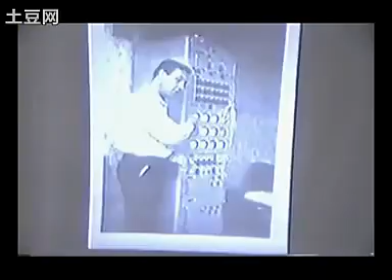This photo is the very first press photo. The press medium came because I advertised in the paper that I wanted members to develop a new type of craft. Here we were demonstrating a ball race.

The ball race, to most technical people, is a subject that must be well greased. For my work, grease prevents the operation, so we get rid of it. Never mind what the scientists say that it will seize up — it doesn't seize up. In fact, you could do some very amazing experiments, which I did for the media, and we recorded the evidence on the tracking equipment. Now from that, the development grew, and we'll show you the next shot.

Here we are, the very first roller that was produced in Germany a couple of years ago. We are holding it because this was a great excitement — hundreds of people have been trying to make this roller. They gave up because their thinking was wrong, that's all that was wrong. They got the roller out and it kept cracking. That is my safety net: no one is going to copy that roller unless they're working full heart with me.

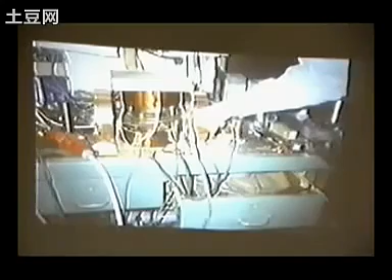Again, you see another view. If you notice, there is a number of coils involved. This again is slightly different to normal practice. Another view of the coils.

Another view. So anyone wishing to make these rollers, realize you've got to have a bit of patience - and I mean patience - and don't give up.

Now you may say, why can't you make it? Well, let's put it this way. If you make a house brick, you've got to buy the ovens and all the necessary equipment to make that one brick - that costs you a fortune. That's the same here. To make one roller, you may be looking at £12 million. So you've got to make millions of them, because after the first one, they cost very little to make. That first one is the bug.

Here is the magnetic field around the first segments produced in Germany. By the way, these pictures are in the books, so those who want to study them more closely can do so.

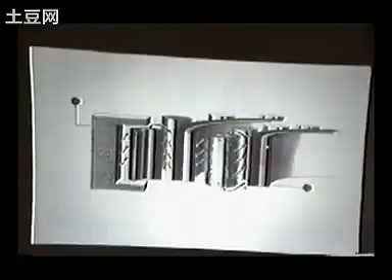Now here is the illustration of the SEG build-up. Can we show the plates with the pointer, please? You notice that is what we call the plate in which the rollers run on. That's what we call the roller, and these have to be slightly shorter than the plate, so they have free movement.

We show here the coil which we build on the outside of the last ring, which supplies the final work. The only difference between this machine and the conventional machine is that this is the prime mover. The coils is standard practice.

Notice we've shown 4 colours. That represents the different layers of elements which are compressed to form the plate. The same must apply to the rollers. The weight of, or the volume of the plate must be equal to the weight or volume, whichever you like to say, of the roller. Therefore, each roller in itself is a generator of its own.

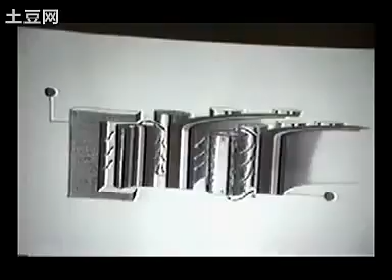Here is a magnetic demonstration which so many people witness. There are letters in the books of people from Australia who saw this demonstration. This particular one is from the report of Gunnar Sandberg of Sussex University.

Unfortunately, he gives you a slight wrong explanation. He says when you place the roller at the edge, it accelerates to its cruising speed. He could not tell you it goes instant at go to the cruising speed. The other people tell you in their report it goes instant to the cruising speed. Why should Gunnar Sandberg say it accelerates? The reason is this.

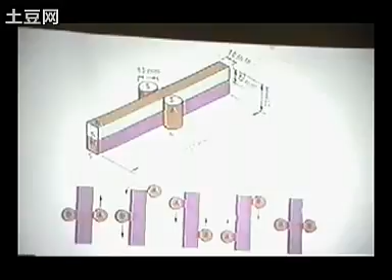He works in the electrical department of Sussex University. He should know why it goes instant, and he does not know. It baffles him. If I was in his place, I would say this goes instant to cruising speed, but at this time I cannot explain why. But we will investigate it and tell you when we know. It would be much, shall we say, more polite, more professional than the way he went about it. You see, as we shall explain a little later, why it goes instant to its cruising speed.

Now this is the reason why the roller rotates. We have 4 elements - you see the colour showing each element. What is happening is we have energized with DC, and on this DC we have used AC. The AC and the DC must be switched on exactly at the same instant. The AC must be at the 0 point, and it must be on the upward climb. It must switch off at the 0 point on the completion of a cycle. If you fail to get that right, the AC will erase the DC.

But if you get that timing dead right, you're left with thousands of little pinpricks of forces. It is difficult at this time to say if these are true magnetic points, or whether we have got surges of electrons on one side and surges of holes on the other side.

But one thing is certain, that if the plate and the roller are magnetized precisely the same, we have a strange position. It says you have got one pole there, but you don't have a pole there - the pole is over here. The next pole is above, that is not in line. You have a wave.

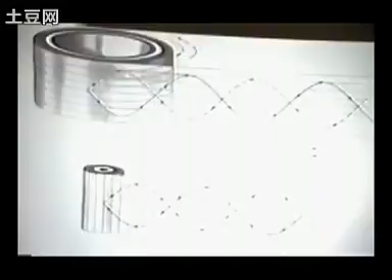Now we have something completely different. We've still got the 2 outer ones, and they fit on the plate with the 2 on the plate, and the roller cannot move either way, sideways. But now, you see, we have gotten 6 more runs of these mysterious poles. They are exerting a force on the plate, so it accelerates.

Another beautiful thing about this is you just drop it on the plate and away it goes. And they say, how did you do that? I didn't do it, that did it.

I look at this and I say, why do we always take the hard road? Because when you drop the next one in, it just sorts itself out. It finds its opposite point to the one operating. Every roller must go the same way.

No matter how many plates you have, they will always go the same way. Now the question is, how do we find how many rollers you want on the first plate? Because we obviously need to know that we've got a steady output. Well, the sum is quite easy.

You take square 3, you know the answer, you're all going to say 9. You're wrong, it's 9 fields. Every field has a value. When you calculate these values out, it is the sum of each column, or each row, or the diagonal. It's the answer to the material quantity you need. Every element is defined by that square that you're going to use.

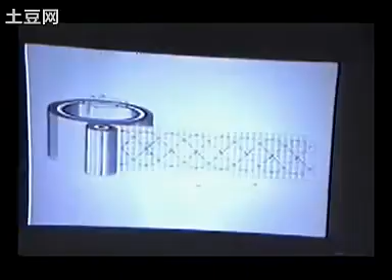We'll now take the next view. As you see, what we have is actually 2 waveforms going one direction, and then we actually got 2 others going in the opposite direction. We'll look at next.

Now this is an enlargement of one of the plates, and this actually is a true plate. We give the measurements, we show you the ingredients we use. As you see, we use a rare earth at our outer edge.

Then you see we use a nylon, and I like to say why I fancy nylon. We can use plastic, but in Germany we see, when I look at the finished thing, that the plastic looks terrible crude. It looks hard, it looks brittle, and we believe that nylon gives a better finish.

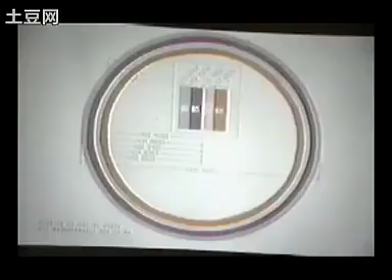Next to that, we take an ingredient. It can be iron or any other of the magnetizing materials. And then on the outer coat, we put one which will not magnetize, but it must produce an eddy current when a magnetic field comes in touch with it. That is the basic of it. How and why it works, later.

This is how the SEG looks. We only use 3 plates. You can use 4 or 5, but then you've got to consider if you're rich - if you're rich, of course, you can put more plates on. But this is a prime mover.

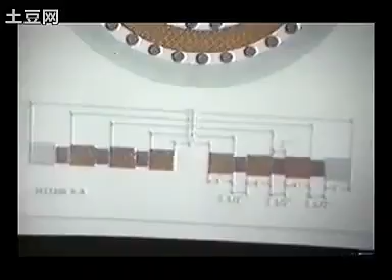It can be used as a home domestic power plant, which we are now developing. It can be used as a car engine. It can either be put straight in the wheels, or it can be put in where your engine is, and 4 electric motors, 1 on each wheel. You've got the energy, you can run at mains, you can run higher if you wish. We can also use it for powering trains, we can use it for aircraft, and it is used on a very large scale to power our levity discs, as they were called.

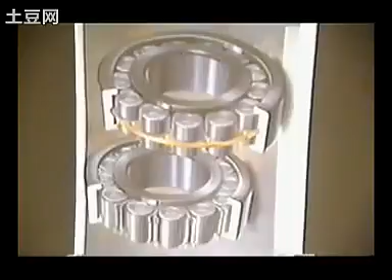Here is basically what they look like. If you can consider ball race, that's what we call them in England, that is exactly what you're looking at in this generator, except you do not need any housing or cage to hold them.

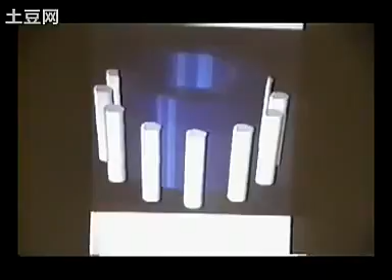This is 1 ring and the rollers, to give some idea of what we're talking about. This is a completed one. These pictures are in book 4.

When you do research work of a massive size, no man can do it on its own. There's too many things involved. You need a dedicated team. This is why I say to all people that want to develop something, you do have to share what you want to do with other people, to gain their expertise. By helping one another, we will come forward with products which will amaze the unbelievers.

We are going ahead with a domestic power plant, and that is a fact. We are proceeding at this time, and I can guarantee that within 6 months I'll be back up and running again. And if anyone doubts that, just put the money on the table. I'm willing to accept it.

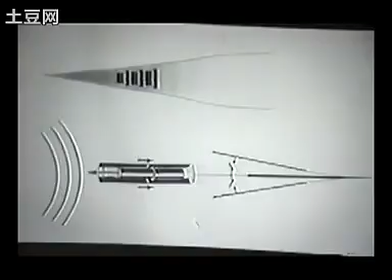This plunger did a number of things. When you signal a change of course, we have 64 of these around the vehicle. The main feed goes out through to the rim, then we have a switching action to the top plate and to the bottom. The power switch top or bottom defines the speed at which you're going to move up and down. When you operate any of these plungers, you immediately switch off the energy at the tip, you switch off the energy at the top or bottom, whichever side you are pumping, and then your plunger strikes and returns.

Immediately it drops at that point. If you don't return power immediately, you will then continue to make a very large circle. You will continue in a curved direction. If the power comes back immediately, then you maintain that level of flight.

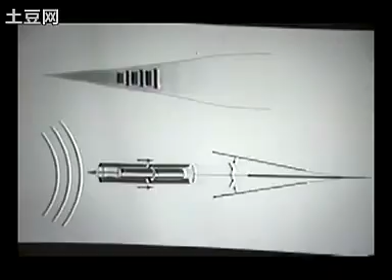As I said last night, I have now given the CAA notice that when we start flying, probably next year, we want clearance of 2,000 feet between all other aircraft. They must not direct us on any aircraft flight path if the aircraft is 2,000 feet in front of us, because it will knock out all their radio control, communications and things of this nature. We are now waiting for their reply that they recognize and accept our request.

Let me tell you something, boy, there were some problems to solve. You may think it's a very simple thing to put together. But when you're trying to prove to 400 scientists who said that such a structure cannot be produced, that it will not support itself, let alone fly, you open the door to all the media to watch you do it. And then you have to solve this problem, because we're going to use the weakest material we can get. Because if the weakest material can do what you say, then the stuff you select to do the job is indestructible. The scientists watch and they laugh.

The television kept coming and recording every step of the work. The media was at their heyday. But slowly the scientists disappeared. They realized they had made a terrible mistake. You see, they said that the structure is a split beam system and it's too weak for the job we want to do. They were wrong.

By the time the craft was built, there wasn't another scientist present, and they never again wrote or said anything to me about what can't be done or can be done.

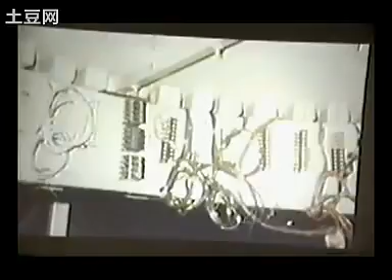We started wiring up under the cabin floor for all the control apparatus that would be used for the radio control side of the craft. We only just started to throw in the leads. They actually go through to the generator. I don't know if you can show where the cables are running through. We just had to string them up because we had the media present and they take all day filming. Right.

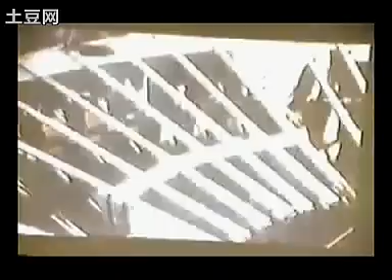Again, we have the colour shot taken by another freelance photographer, again showing you how the structure of the body is done. Another view, the shell has gone on.

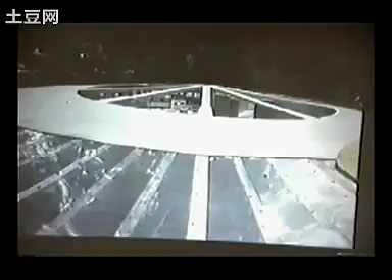Now, we had a problem here. If television was going to show this craft, the last thing we want anybody to say is that you've got batteries in it. We actually had a scientist say to Louis Gennaro, when he demonstrated again, look to see where the battery is. Now, does anyone know what battery is available that can lift a 12-ton lump of material? If you do, please tell me where I'll get it.

In a video we released for ITV, we are on daytime live and the scientist is demonstrating. He winds up his little flywheel effort and releases it. He said that he believed John Searle whipped this up, got it up to high speed, and it lifted up and then fell over in the ditch next door. So I asked Louis to write to him and tell him we invite you to come and twist this up and let it go. We never had any reply.

On the television program, at the end, if you get the video, the interviewer was very funny. He was rubbing that scientist quite hard, and then he said, you people never believe anything unless you see it. So he said, if John comes and hovers a 3-foot thing in front of me, I will then believe it. That was part of the action.

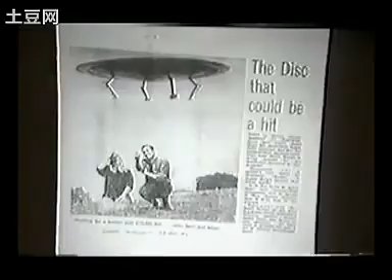But this was an interesting news article. Every so often in England we have what we call the UFO sky search, where everybody goes running out to different areas to watch the sky, and the media point this out. What they're really saying here in the article, they only saw us - we were testing our latest craft.

That, by the way, is the wonderful girl that went to great lengths to keep the cameras flashing. Again, another press photograph - in fact, that one was recorded in many newspapers all over the world. That is perhaps the most used photograph in the world. I think no matter who sends me articles from all over the world, books, that photo is in it.

That, by the way, is the P11, and I like to point out an 8-force wind was blowing. The reporter's asking me, how on earth does that keep still? And I am explaining to him that those white sections - can we put the flash on the lower part - are the sections of the body that's been opened. What we're doing is using the gale force 8 as one field, and we're using the lack of field on the craft as the opposite.

And we reverse this to the back side of the wind, so we're holding it dead still. We held it for an hour to show them it won't move until we change the conditions of the craft.

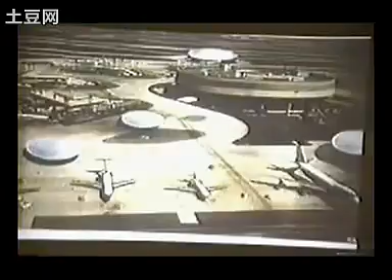This is Schiphol, the airport I did my international flying in, when I took passengers to add weight to the aircraft. As you see, we are projecting the 21st century - Schiphol is actually developing a new section to the airport, and I think you'll realise the 21st century is going to look quite different to what we know.

John Thomas and his son have produced an image of the disc in space. These pictures are in the books, trying to give you the idea, the image of the craft, so you get used to it - so when you see one next time in the sky, you'll know who it is and who to blame.

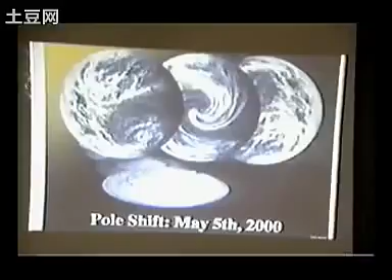Here's John's illustration of what we think will be the pole shift in the year 2000, which of course we hope we got the disc to get out the way until it's settled down. Everyone want to book a seat to get out the way? Give John the name, we'll book you a seat. I'm the first one.

Right, now that's the end of the slides.

I try hard not to make technical things hard. I know, I have to attend lectures and you can fall asleep very quick. I don't like you paying to come to sleep when I'm talking. You can go home and have it free.

When you come here, I want to try to capture your mind into the interest of new technology. I want you to think and look and see. When we demonstrate, we want those who are interested, not the people who cannot be bothered to come find out what's going on. We want you who do take interest in technology to keep in touch, because we want you to see what we're doing, and it's only a short time away when we'll be up and running. I have told this organization that 1 hour is useless.

After all, I've been lecturing 3 weeks in Denmark. At 9 in the morning, supposed to stop at 10, at 3:30 we're still going in the morning. They had to pull me off to get me to the next place. 3 solid weeks, 7 days a week, and that still wasn't enough punishment for them.